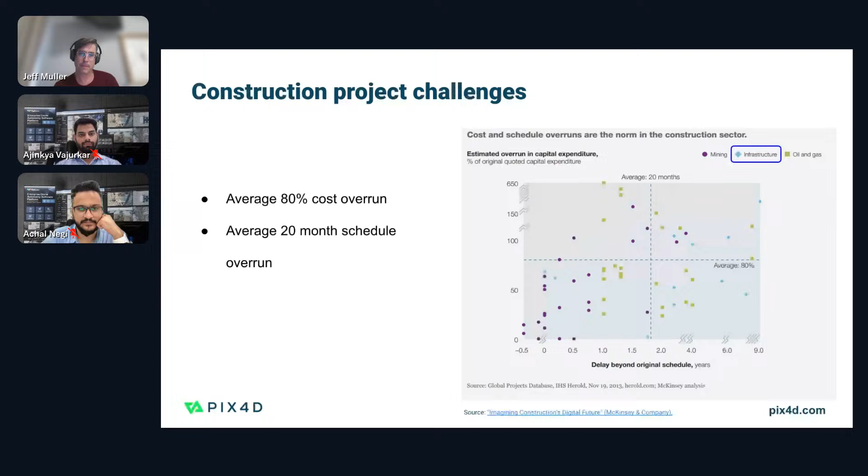And one of the nice things about drone data, for any of you who've used it, is that you actually now have an authoritative and up-to-date view of a construction site or a job site or, let's say, an environmental area. And there's a wide range of use cases for the data, obviously. But in practice, it really gives you up-to-date, precise information so that everybody can be on the same page, literally and figuratively, with that source of truth. Next slide.

So if we summarize this, construction projects are having these cost overruns in large part due to rework, bad project data, and communication problems. And we know that drone data has a potential significant impact on reducing these and improving on them. Next slide.

But the issue is that with these traditional drone workflows, where you go out with a single expert, you have these skilled professionals that love to go out to these job sites. They love to go out and fly the drones and capture high quality data, but this comes with additional issues. And I'm going to hand it over here now to Achal, who's going to give us an overview of these issues.

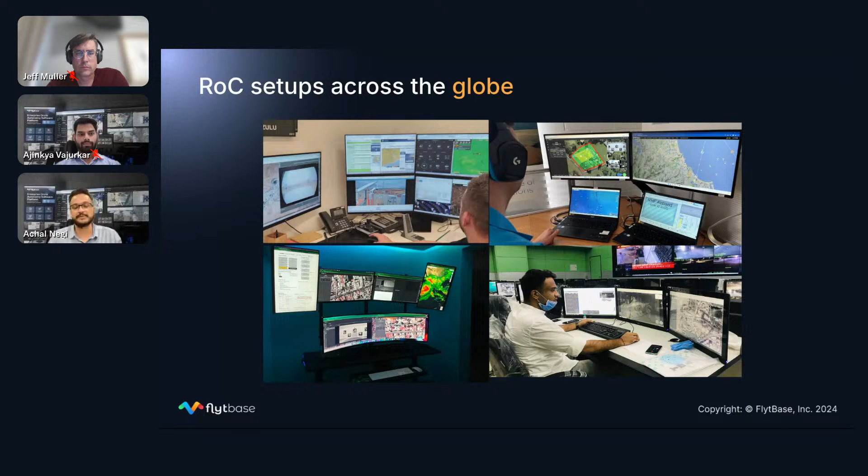So these are some examples of how people have set up their remote operations center, and we provide detailed training as well as guidance to our partners and the end users to set up these kind of systems for remote operations with all the integrations with the right hardware and software. So let's take a deeper look at what are those features which could help you in construction as well as other use cases, and features which allow you to do things related to pre-flight.

So the number one thing, FlytBase provides an intuitive dashboard for your site management. So you can deploy docks at multiple sites and create these sites and assign people and drone docks to that particular site. You could have the location, assignment of the dock, assignment of the people. So a limited set of people have access to that drone or dock, and they have the entire functionality available to use that hardware resource for photogrammetry and mapping.

You could also, of course, fly, and if you have your 2D maps already there, you can overlay those maps on the base layer, so you are effectively able to plan different missions for further 3D processing or 2D processing and do the entire mission planning. We also provide mission tags where you're able to create different tags for different missions, be it mapping of a certain asset, or you're mapping some other pieces, or you need to categorize them. Mission tags come in really useful in categorizing your different kinds of missions.

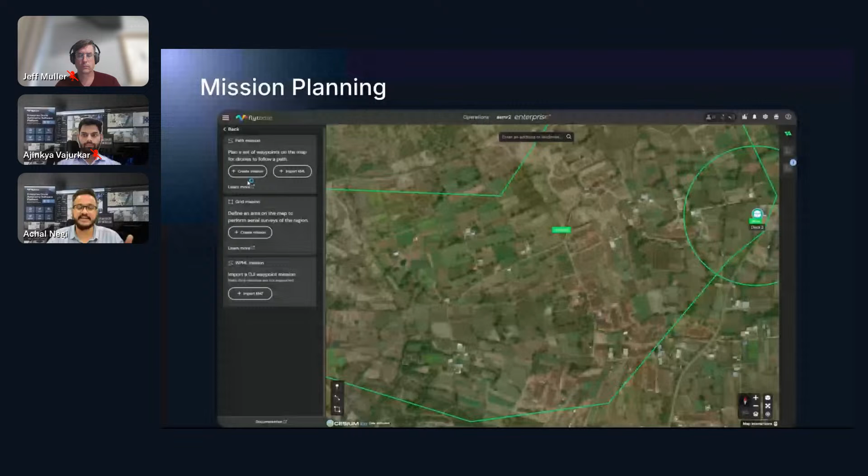Mission planning functionality. So your entire mission planning for dock operation is taken care of, be it a grid mission, be it importing a WPML file from your existing planned mission, or creating path missions. All of those things are taken care of inside FlytBase. You can, of course, have entire grid mission functionality where you can select the GSD, the route altitude, and so on.

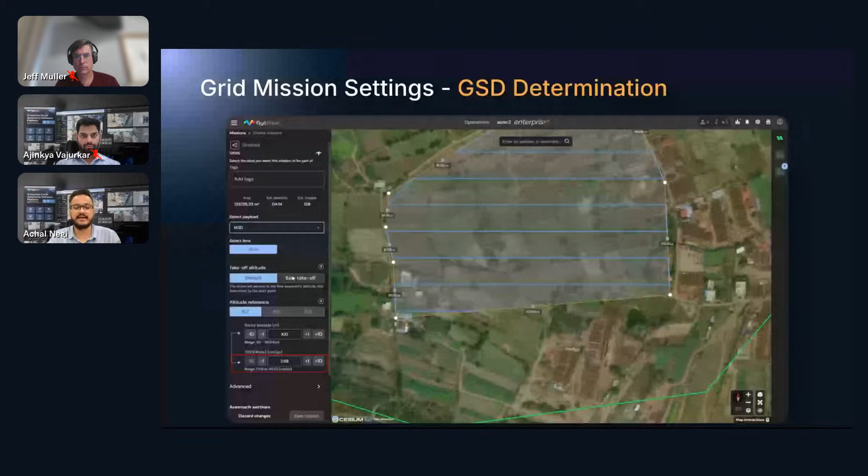You can also set the overlap, which is required for your photogrammetry missions, and that will be covered. You can also set the speed, grid angle, and everything which is required for the dock operation. You could also select the right payload. Depending upon what you have, for example, if you're using an M300 drone and you have a different camera, like a P1, or we have a partnership with Phase One. If you're using certain kinds of cameras, you could choose the right payload so you could get the right settings for your grid mission planning.

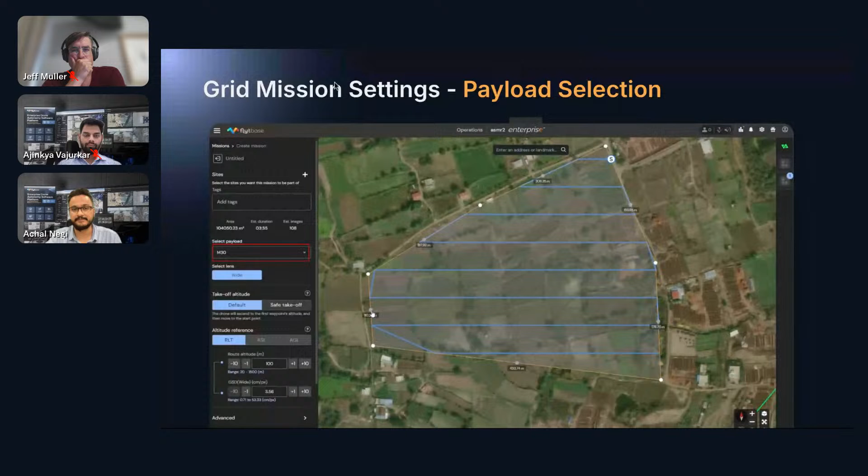And once this is done, you can schedule the entire mission. And this is the beauty of automated missions, right? Where you can create the entire calendar and have your inspections or photogrammetry done as per the calendar. The system would automatically launch the drone from that particular point and capture the media for you and make it available in the post-flight scenarios.

So once we get to the post-flight, you get the entire gallery view where you have different filters of how you can select the data, see the sites, manage the data. We have the folders, we have the file system where you can beautifully organize your data. You can also filter that out depending on the date, size, flight type, drone type, mission type, and manage the entire data that is collected from FlytBase.

But once you have done that, what do you do next? Right? You want to create a 2D map, you want to create a 3D map, you want to create a report. And that is where FlytBase Export Manager comes into picture, where you can share that particular folder or the images that you've automatically collected with the link with Pix4D and choose the Pix4D link, and it would be automatically shared with Pix4D for the data processing.

And now let's look at how you can integrate Pix4D and select the right data processing platform to process this data. So for that, I would invite Jeff again to talk about Pix4D.

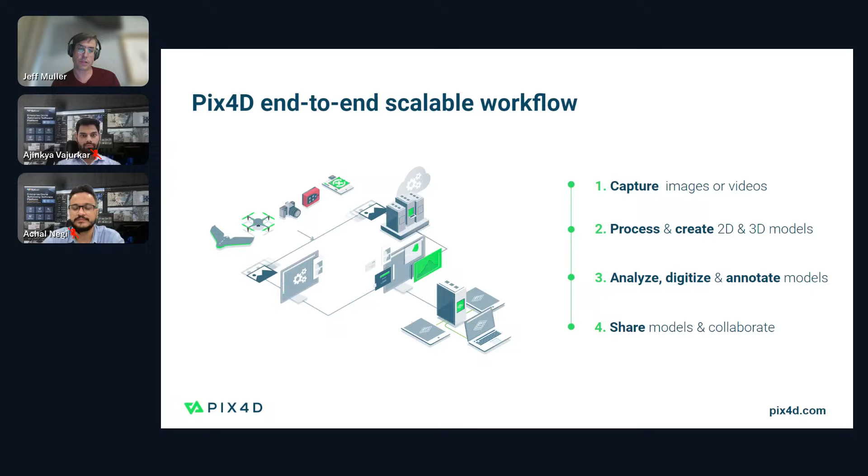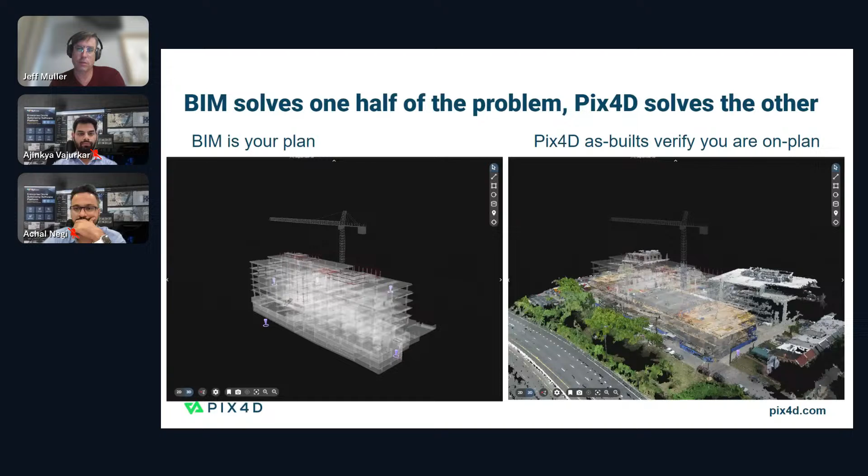But the problem is that this is really your plan for how you're going to work. And what you actually do need is regular as-builts to verify that you are on plan. And verifying here can take a number of different forms. I won't talk so much about that, but if you've actually been working with construction companies, you have some idea of what I'm talking about.

And so if we consider that the built asset lifecycle has a certain number of phases. So you have your design and planning phase, site preparation, construction. After the construction phase, you have a sign off, then you go into site maintenance, and you have an asset to end of life. Now, all of these phases for Pix4D are important, and we actually provide scalable, precise scanning that can be used and has value at each of these stages.

So in the design and planning stage, drone and ground surveys are pretty much the standard operating procedure in the world now. Initial earthworks are planned with drone maps. This is usually done as a one-off, and it might cover something much larger than the initial construction site. This also typically follows on with some work during the earthworks, and if you have a drone dock at this point, then you can get regular updates on earthworks progress, which for a project manager can be high value. It also gives you some idea of where you are in the process in terms of, okay, we still need to move this amount of earth to reach the design surfaces in these areas.

During the construction phase, especially during vertical construction, I would say, you have these extensive concrete forms that need to be built and poured, and then you go on to the next step, next floor. If you have drone monitoring, I would argue daily or two times daily is a good metric. Then you really have an extremely precise view of both the current state of the building site, as well as crucial checkpoints during that process, which can provide you data that you can then use in site maintenance later on.

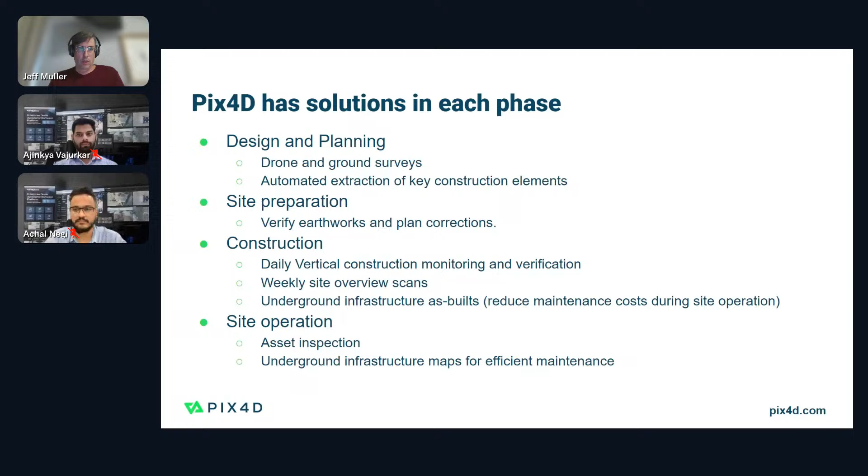So during the design and planning phase, typically these are the outputs that you want. We're world-class in producing these, provided that we have good high-quality data with proper mission planning like you get from FlytBase. So obviously that's important.

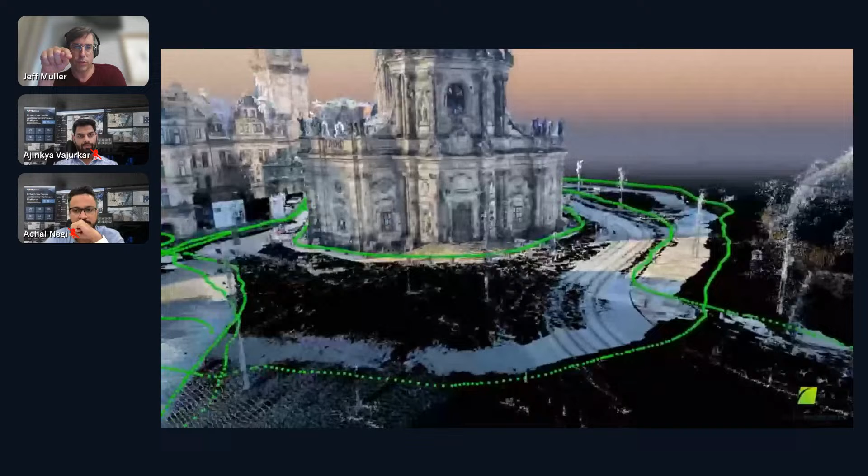Another thing that we're doing recently is we're also doing some terrestrial scanning. So you see the green dots are the camera pictures that were taken from a mobile phone. And this gives you a high resolution point cloud of downtown Dresden in this case. And this is a nice supplement to what you can get from overhead drone scanning. It's often difficult to get some of these vertical facades, and they can give you a really nice point in time. Or if you have places with extensive tree cover, this terrestrial scan can actually be merged.

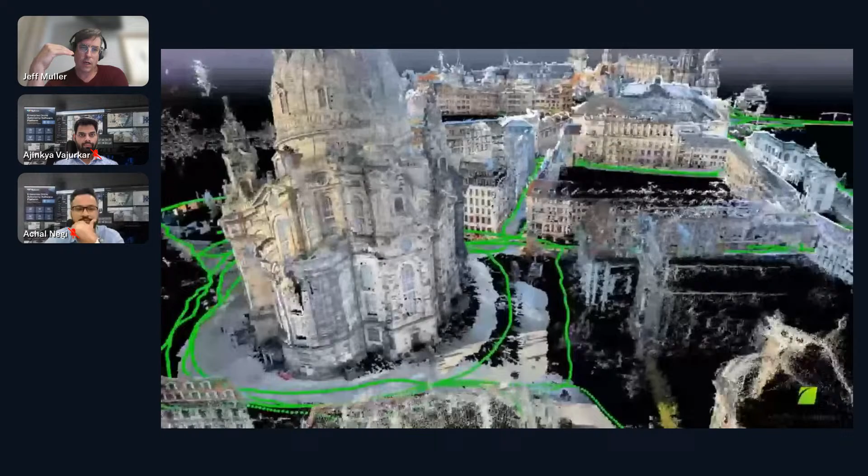And if we're talking about professional quality drones, typically they have RTK. These workflows that I'm presenting here, because they use RTK as well, it's easy to align them in absolute space, and the data can be merged extremely easily.

So the other point that we have is we have extensive tools in the Pix4D ecosystem for digitization of as-built elements. So we can automatically detect manhole covers, drains, curbs, road elements for various job types. These are extremely useful. We can detect objects that are often missed by humans. And we're adding additional classes of objects on a regular basis.

And then finally, Pix4D Cloud really gives you an easy way to share this with the entire team. Point clouds can be extremely heavy, in the gigabyte or hundreds of gigabyte range. Pix4D Cloud basically means you can do this on a mobile phone, so there's no need for any additional software to be installed. And Pix4D Cloud also has the ability to keep this history of a given site, so you can go back and look at previous days, all inside the same building site, and you can overlay on top of that your existing CAD files for reference to design work.

The other important point here from all of these workflows, typically if you digitize any objects, you want to use them potentially in a GIS package or in Autodesk, or if you're doing infrastructure management, GE Smallworld is another popular software package. So we have export options that allow you to take the outputs from Pix4D into these software packages. Obviously, that's a crucial part of most workflows.

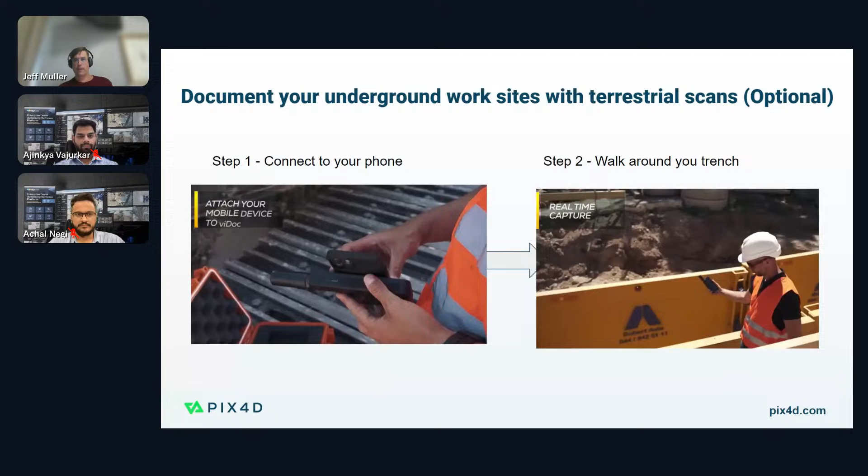So the idea is that you attach an RTK receiver to your phone and you walk around, you scan as you go, and then you can import that into Pix4D Cloud. And this gives you some idea of the digitization capabilities that are available there. And as we said, sharing with your favorite software.

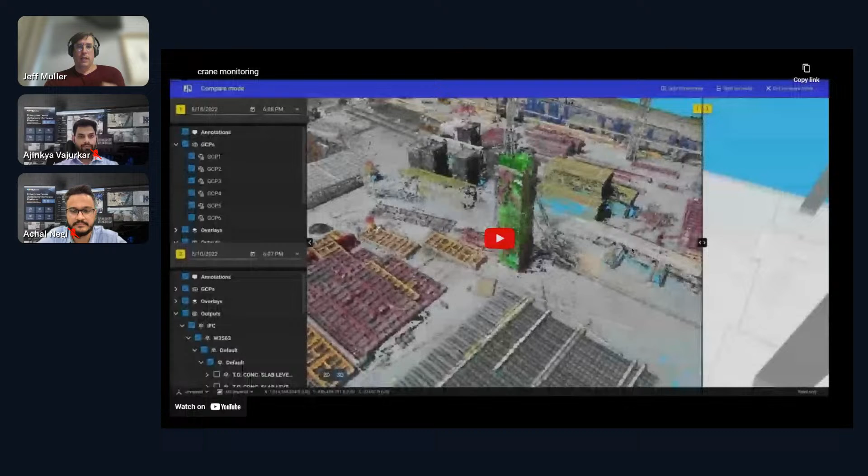But if they had waited and done the next floor before they had done that, the cost would have been significantly higher. So this is a good example of why these daily scans can actually be useful in these concrete high-rise projects. And to give you an idea of how this can be checked and why it's important to have up-to-date data, I'll show you this video here.

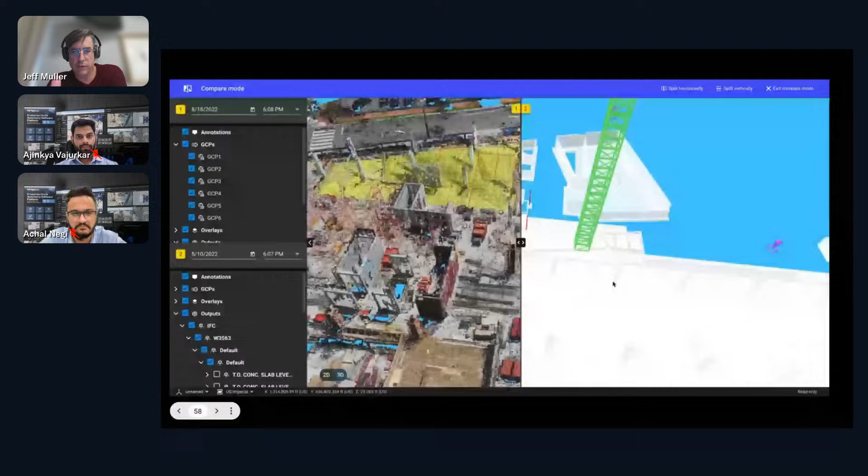So you can see here you have your BIM overlay, which we see on the right-hand side, and on the left-hand side you have the point cloud that's collected for an existing concrete site. And you can check that what you've put in place actually matches the design. So if you have, for example, formwork up, you can actually scan before the concrete is poured, and you can verify that it actually matches up to the design.

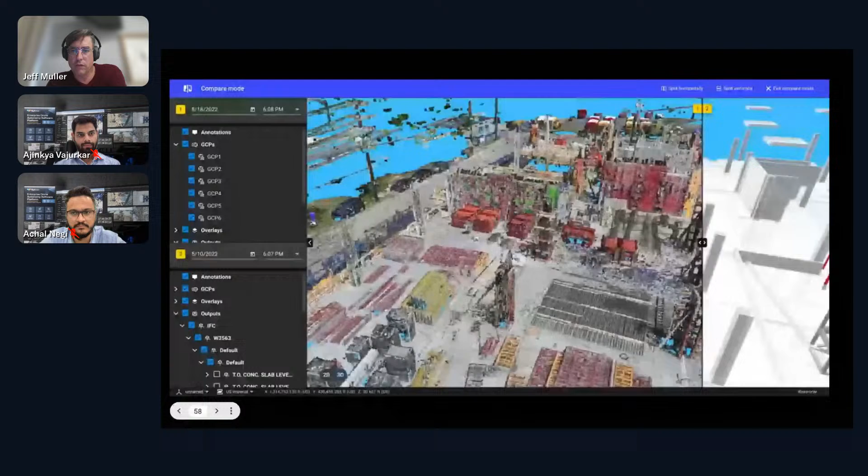So you can see here we're checking this critical load-bearing pillar, making sure that it actually matches the design. And that's going to be crucial to making sure that you don't have any kind of structural issues in your projects, and that you don't have any need for a rebuild later after you've done the concrete pour, which is going to be extremely expensive.

Okay, so if I can get my next slide here.

We've been doing some of these monitoring projects, about 40 different sites over the last 5 years. And if we look at a 12-story building and the average frequency of errors requiring demolition, the average cost savings over a 12-month period is about 40,000 in terms of staff costs and about 180,000 in terms of material costs. So roughly around 220,000.

This is a small subset. I mean, 40 sites is not a lot, but it's pretty representative because it comes from different sites in Europe. So some places the costs are slightly lower, some places slightly higher, but ballpark wise, you can see a pretty significant benefit from doing these daily scans. And the reality is it's virtually impossible to do something like this, twice daily scans, without the automation that you get from FlytBase.

So the other final point here, and this is also another key point, and why you want to engage in this process in your companies, and why you should convince your customers if you're a service provider, is that it will improve their ability to do sign off. We increasingly have customers who are actually demanding some of these outputs as part of the sign off. And verifiable project state throughout the project can actually mitigate disputes and reduce costs significantly. We've seen this time and time again. It's a very clear outcome.

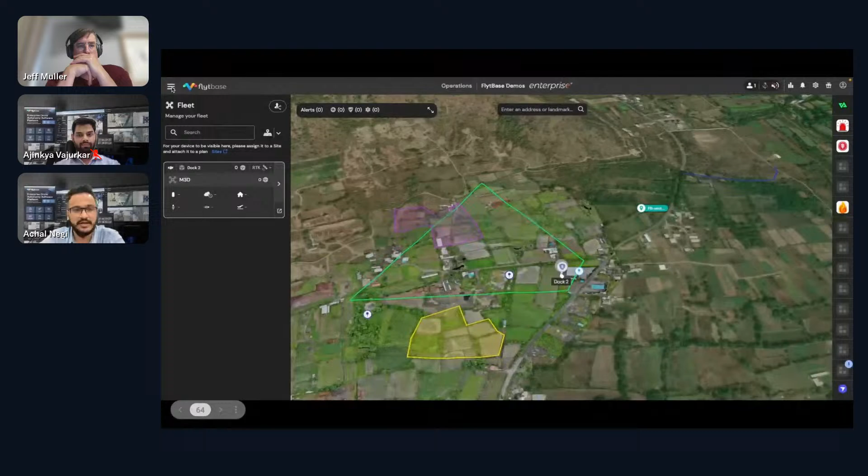So this is automating dock drone operations with FlytBase and Pix4D. FlytBase provides you the entire remote operation capability. You of course have to link your Pix4D account with this. Our team would assist you with how you can integrate the Pix4D cloud account. And once you have integrated that, you can add a site where you have deployed your docking station. Once you've added a site, the map goes to your site, and you have the entire site on the base map available to you.

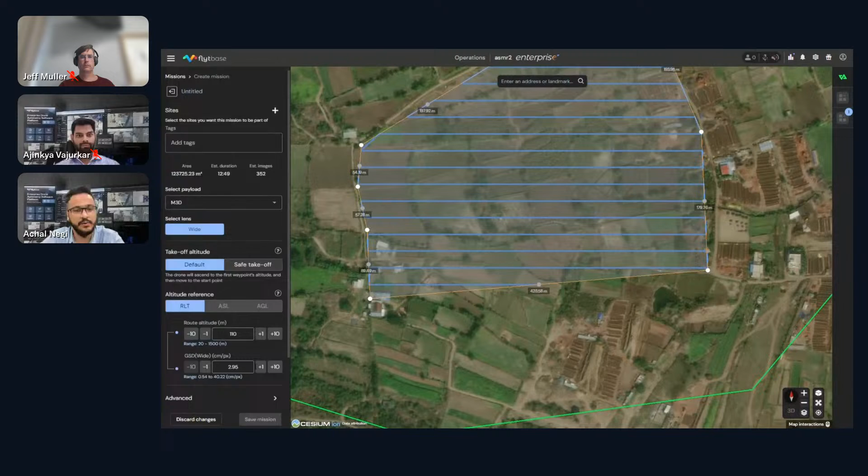You can go to missions and create different missions, right? So you can create the entire area that you want to capture, and FlytBase provides a sophisticated utility for your mission planning. Suppose, say, you're using DJI Dock 2 with the Matrice 3D drone, and you can use either the thermal drone or the normal RGB camera. You can have those drones selected and you can tag those missions so you know which kind of missions you have. Then you can go and directly launch your drone.

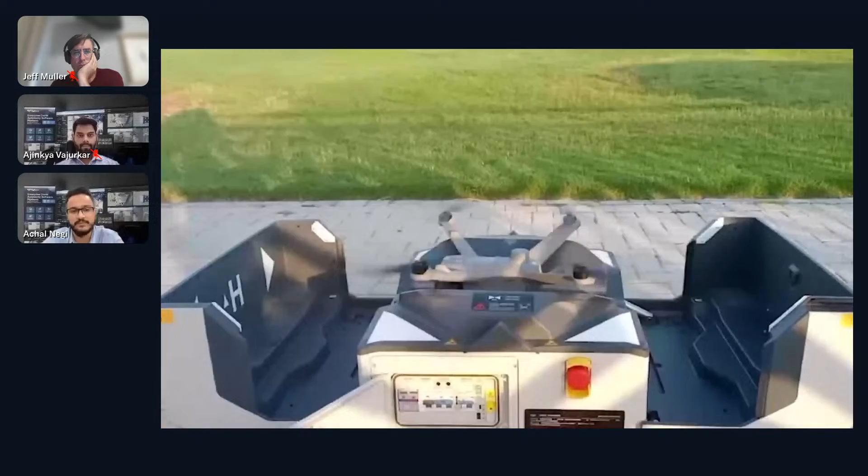You can see that the dock is opening. You can see the live video feed from the docking station. You now also have a live video feed from the drone. The drone takes off and does the entire mission for you. So this is entirely automated, remotely connected. The drone would go to that particular location, start doing the entire operations, and you could be sitting remotely at a distant location.

You would of course get the entire live video feed on your screen, so you can see the live operation sitting remotely. You get the entire location of the drone as it's flying and capturing the data. In case the drone is not able to cover the entire mission in a single flight or battery time, FlytBase takes care of everything. The drone will come back, land, recharge, and continue the mission. And once it is done, it will come back and land.

Sorry for my internet in case you're not seeing the video smoothly.

But yeah, the drone is back in the docking station. And of course, now you need access to the data. You have all that data available in the gallery where you're able to see the captured images. You can choose the media that you want and use the export manager and the Pix4D Flink to export the entire data to Pix4D Cloud. Just go to share to Flink, choose Pix4D from there, select the site and hit the share button.

And FlytBase would take care of everything with the Pix4D Flink and the collaboration with the Pix4D Cloud platform. All of that data would be available and you can directly view the model from Pix4D. So for the mission that we flew on that site, you have the entire 2D, 3D map, orthomosaic map available in Pix4D Cloud. So without going on the site, doing those operations remotely is entirely possible with dock drone operations. We discussed the benefits, and this is how you can do the entire operations there.

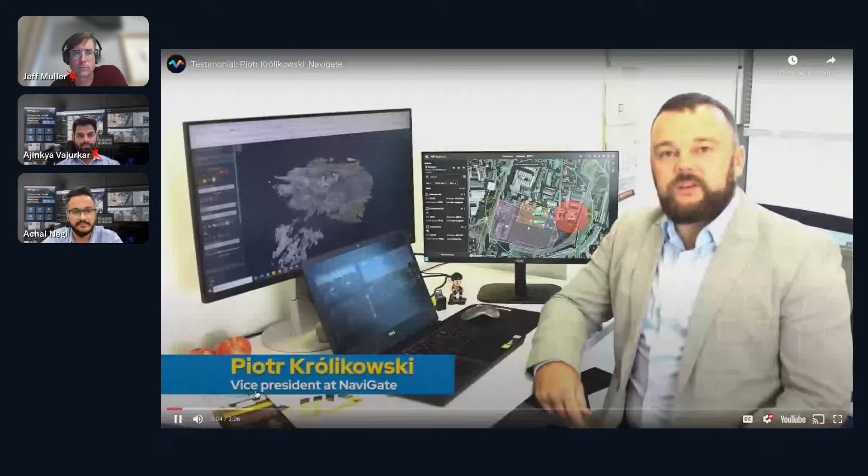Hi, my name is Piotr Królikowski. I'm Vice President at NaviGate. I am responsible for the drone sector. We are a supplier of many advanced UAV related solutions to the Polish market, such as FlytBase, where we are a bronze partner, and Pix4D, a premier partner.

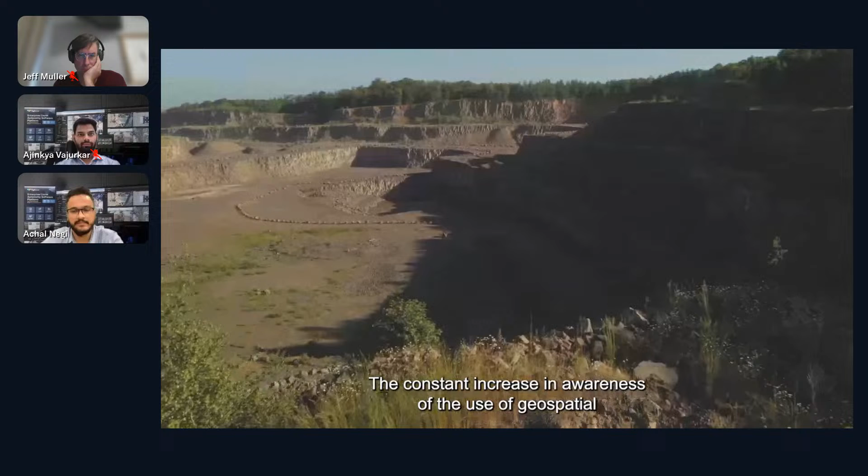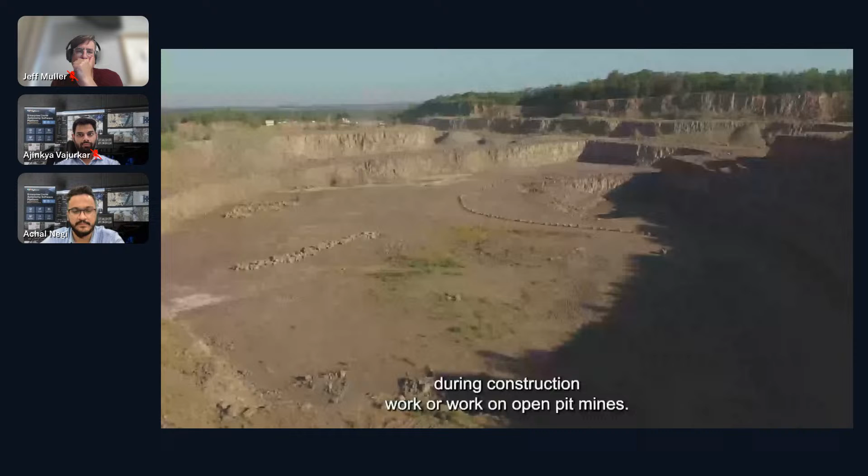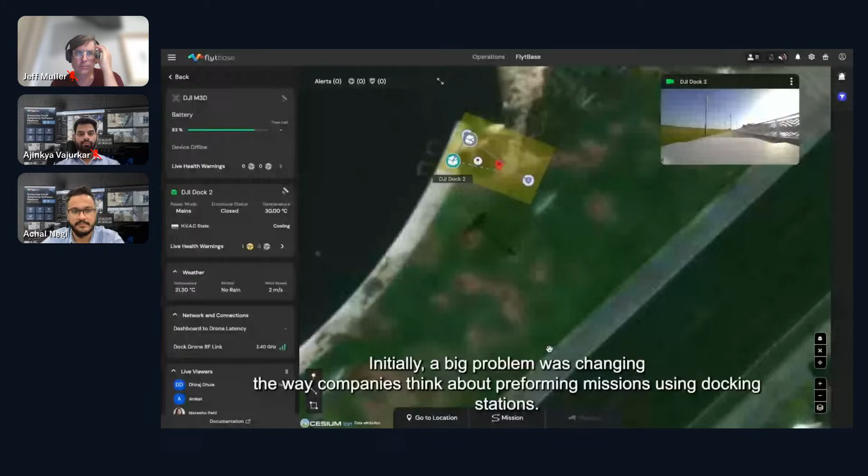Initially, the problem was convincing the companies about performing missions using the docking station. It was difficult to understand that the execution of a mission with appropriate permits can take place from anywhere in the world and can be done by one person in many places. We tested the entry process on our facilities before delivering the appropriate solution. Of course, at the beginning, we had to familiarize ourselves with the presented solution, but it turned out to be much easier than we thought.

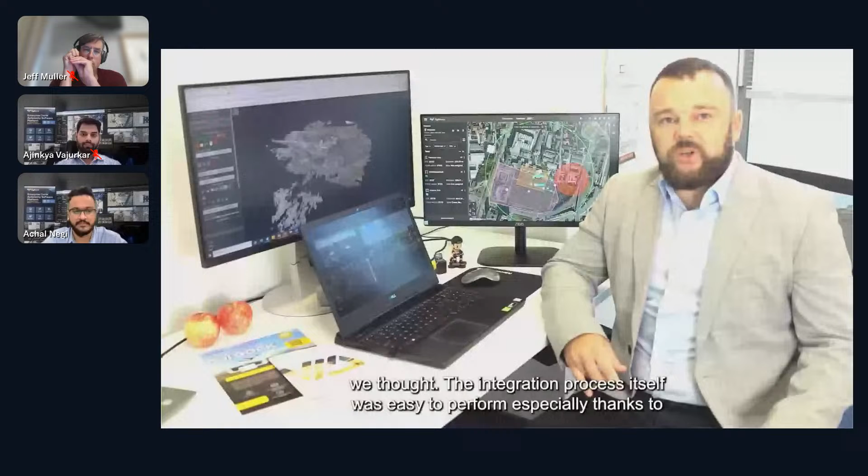The integration process itself was easy to perform, especially thanks to the help of FlytBase and Pix4D, having extensive experience in implementing standard UAV solutions in photogrammetric works. We passed on to the client knowledge of how to plan a flight so that the data was of the highest quality, as he expected. The solution significantly improved the efficiency and quality of data collection.

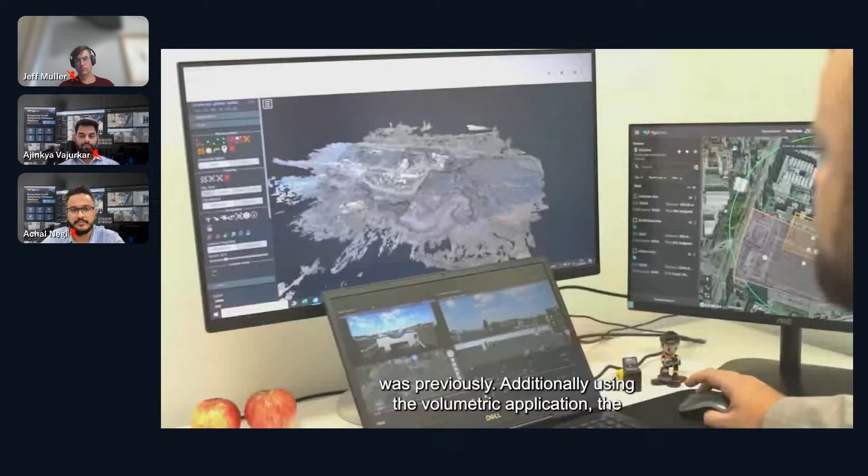With the equipment of an office station where one person works, the client is able to handle several activities in one day. This is a huge change compared to what was previously. Additionally, using the volumetric application, the client receives a ready report on the amount of collected material on their phone or email every day. The report contains all the important information needed for their work. They do not have to worry about the collected data, they simply receive ready material.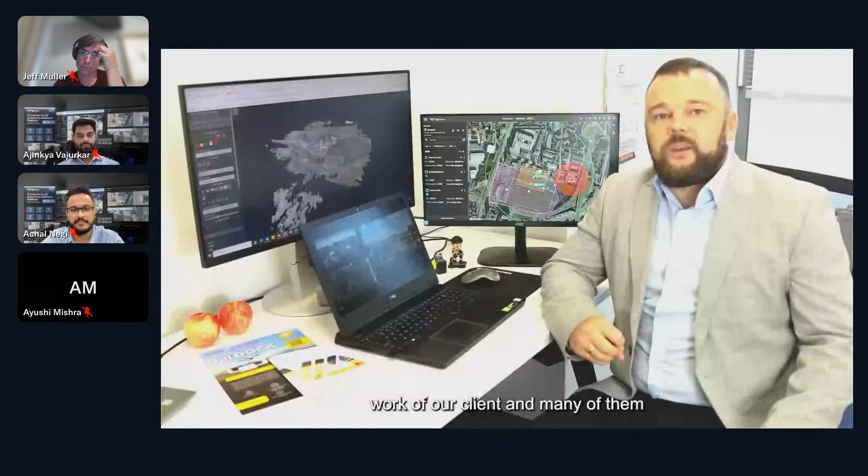To sum up, the proposed solution significantly improved the work of our clients, and many of them saw how much drones can do in everyday activities. Great. So that was a testimonial from Navigate and how they are leveraging this and planning to deploy it for their customers, leveraging the automated drone docks as well as Flightbase and Pix4D.

So with that, we have come to the end of the webinar, and you need three things to get started. Of course, you need the drones and the docking station. We can help you with that. We can connect you with the right partner, or in case you already have a drone and dock, we'll tell you how to get started. Of course, you need the Flightbase subscription as well as the Pix4D cloud subscription. Once you have these three, you would be able to use and leverage the entire automated workflow.